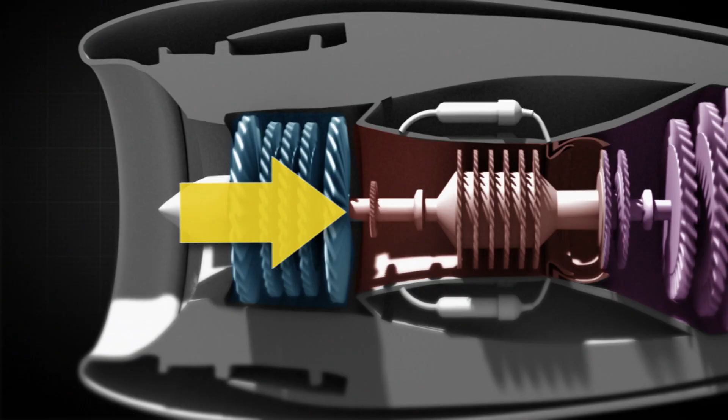We might not notice, but tremendous technology and mind-boggling science constantly surround us in the products we use every day. Behind their practical use lurk hidden histories, dramatic discoveries, and awesome experiments. They are wicked inventions.

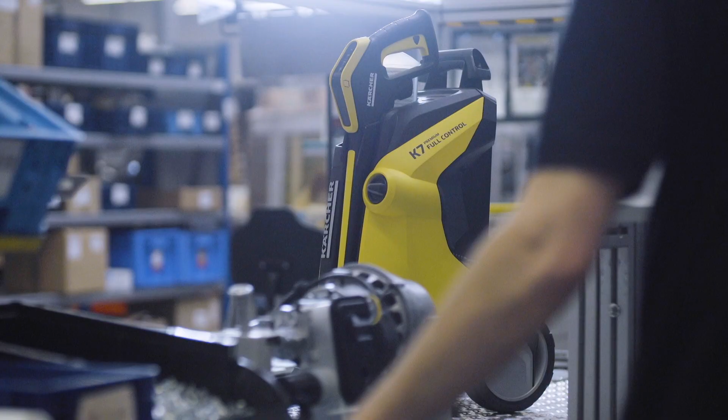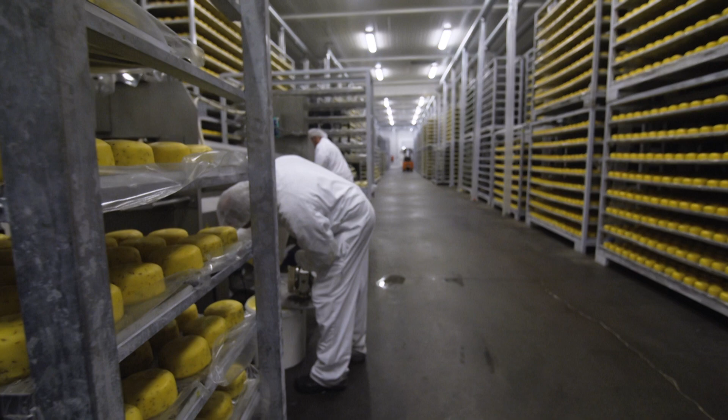Coming up, pressure washers. How an alcohol incident led to a better way to clean. Steam engines. How can boiling water push a train down a track? Cheese. What is the connection between animal stomachs and the discovery of cheese? We reveal the history and fascinating production process for this fantastic food. We reveal the surprising science and amazing manufacture behind these wicked inventions.

Pressure washers use high-pressure water spray to remove mud, dirt, or even dust from surfaces and objects, such as vehicles and buildings. But just how were they introduced? Pressure washers, like a lot of inventions, actually came by accident. And it was a man called Frank Ofeldt, and he was actually trying to create a portable whiskey distillery during the Prohibition time in America.

In 1926, he discovered that the steam bursting out of his contraption was actually moving the grease on his floor, and he thought he was onto something. This accidental creation turned out to be a wicked invention. When Ofeldt searched for components for his steam machine, he collaborated with Frederick E. Schumann of the Homestead Valve Company. This model was known as the high-pressure Jenny.

A little bit later, in the 1930s, German inventor Alfred Karcher invented submersible heating elements, and this was part of the beginning of pressure washers. So he combined these elements to create what we now know as a pressure washer. And it was only in 1950 that he actually put all the elements together. The key element was the water, and it was the strength and the power of the water, the intensity of the water hitting a surface, that actually created the cleaning process.

This washer was called the DS350 Jet. This was his company's first of many products. The DS350 model relied on steam, whereas this wicked invention now has a high-pressured water flow, regulated temperature, and the ability of injecting detergent. So since 1984, they've been available to the public, and now anyone can have a pressure washer to clean their car, their patio or their driveway, and it's easy for everyone. So, just how do companies such as Karcher make them today?

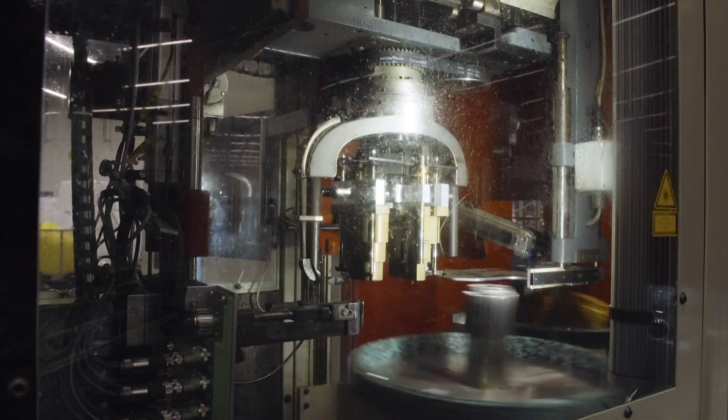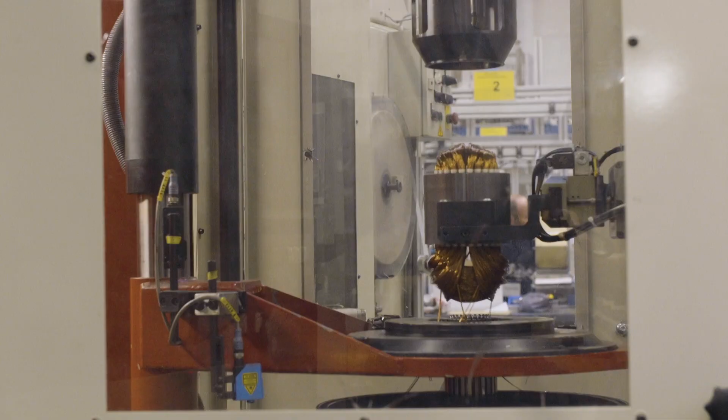Karcher, based in Germany, are world-leading producers of pressure washers for domestic and industrial use. Karcher is the leading company of cleaning equipment in the world. Since 1950, we produce high-pressure cleaners and other cleaning equipment very successfully. The production of a pressure washer begins with the all-important electric motor, otherwise known as the engine. Here we can see the stator winding for this motor. 480 meters of copper wire are spun at very high speeds, a whole 150 turns per minute. This stator using the spun copper wire will essentially generate power for the pressure washer.

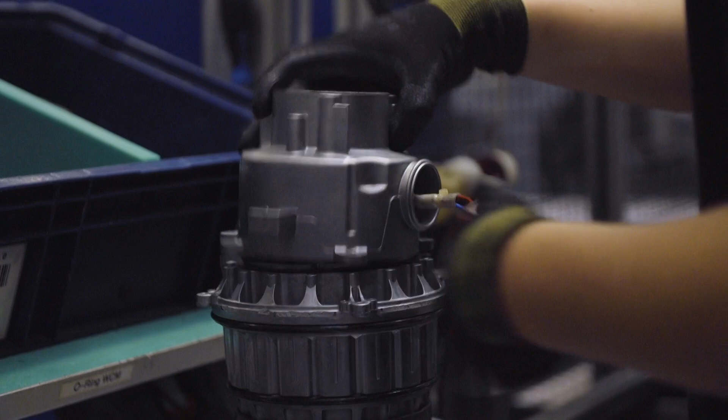The power is generated in these electromagnetic motors by passing alternating currents through opposing pairs of magnets to create a magnetic field in the motor's rotor, causing it to spin around fast and generate power. This particular motor will be able to generate 160 bars of pressure in the finished pressure washer, unleashing a whopping 600 litres of water an hour. Paper insulation is added to the motor before the finished unit is checked and transported to the next stage of production. The final step in the production of the engine is to mount the cable harness to it. Once this has been achieved, the basic engine is complete.

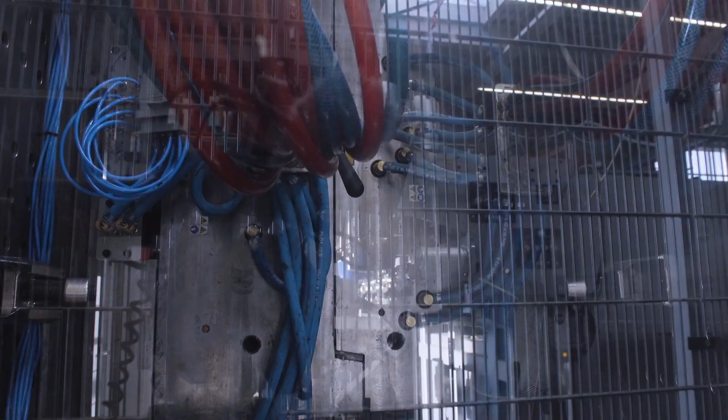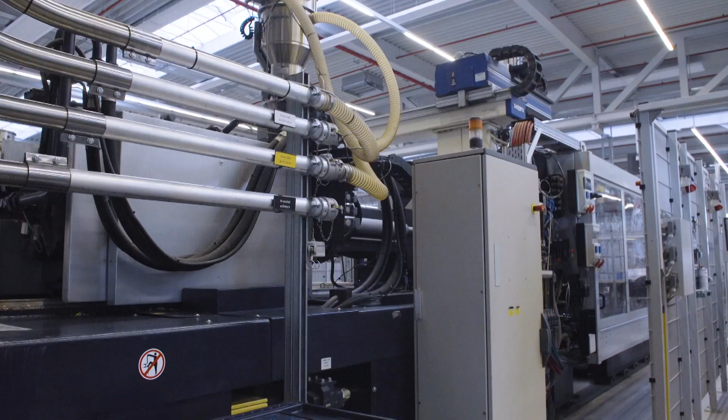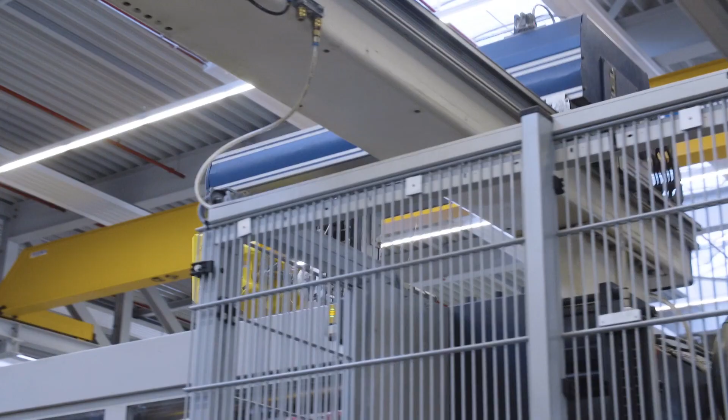Whilst the engine is being prepared, the plastic parts of the pressure washers are formed using injection moulding. At the injection moulding machine, raw plastic pellets are heated and pumped into purpose-built moulds that will form all of the external casings and covers for the pressure washer. These parts here will go on to form the hood and the chassis of the machine. Once moulded, the parts are stamped with all the relevant logos in another highly efficient automated process.

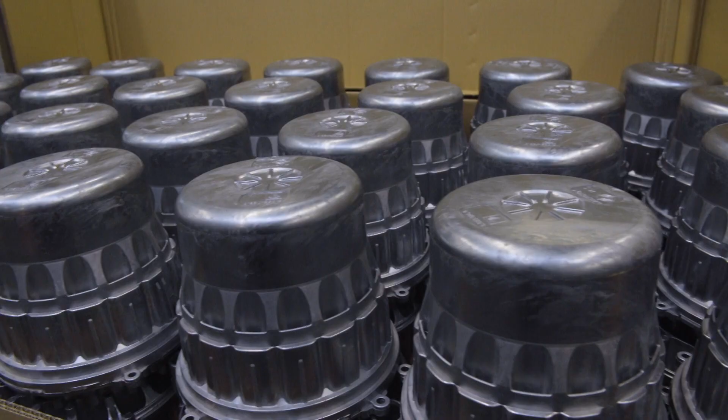More than 50% of the value is automated with robots and automated machines. So we can produce very competitively in Germany at a high quality level. The next production line is the motor line. The aluminium housing of the motor is prepared and fitted around the stator that was prepared earlier.

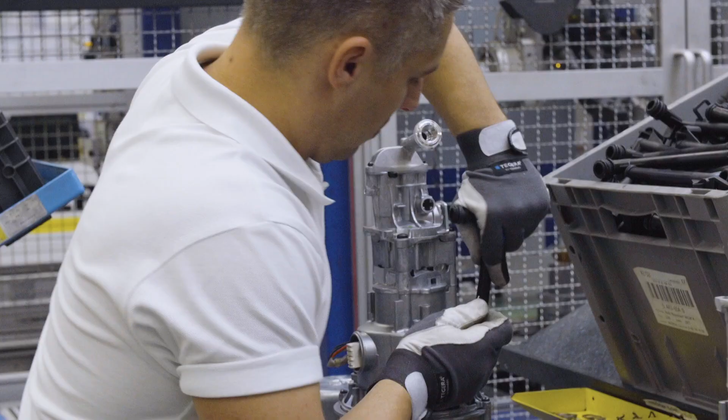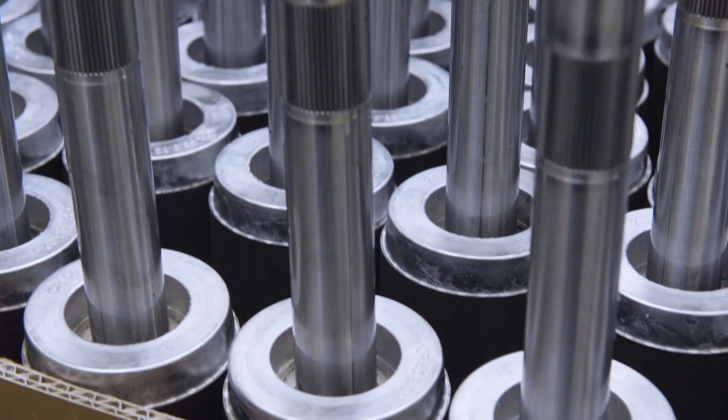From here, the machine is built up, step by step, in a number of assembly line processes. These include fitting the shaft to the rotor and installing the water inlet. This station is actually called the 3-in-1 station, as 3 processes all happen here. These are the screwing of the water housing unit, the oil housing unit, and also a leakage test.

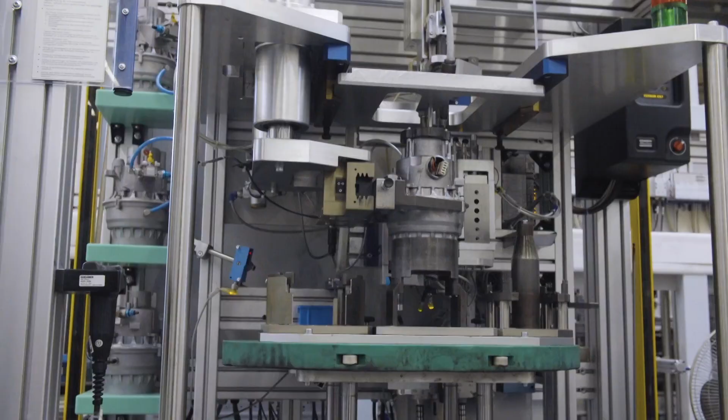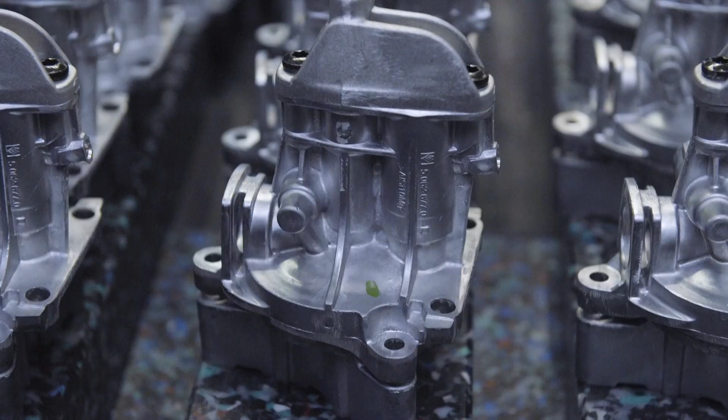At this station, the motor housing and the cylinder heads are screwed together. If these parts are not in exactly the right position, the assembly process will automatically stop, thanks to optical sensors that are constantly operating. And after this, the pump set is complete.

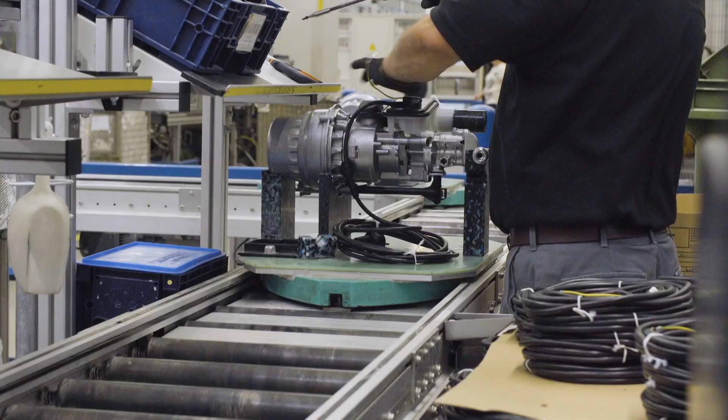From here, the electrical system of the pressure washer, known as the E-box, can be assembled. This E-box controls all of the pressure washer's electronics, most notably including the connections of the main power cord and the on-off power cord switch. The machine then moves on to a fully automatic testing station to ensure that everything is operating as it should.

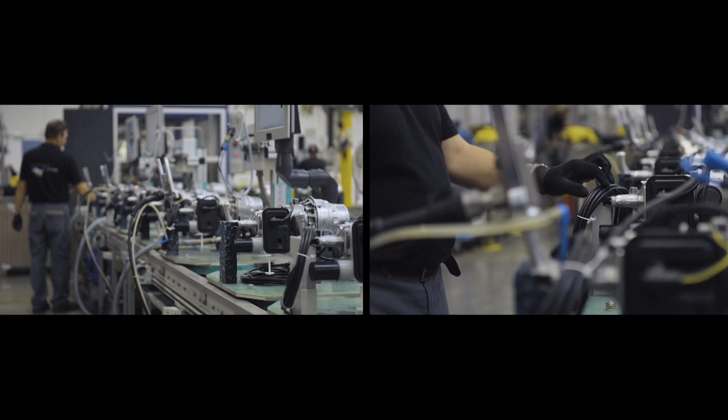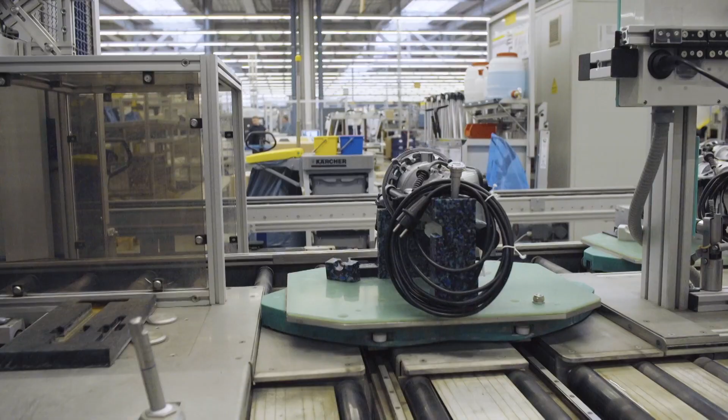In high season, every 3 seconds we produce one machine. So we are able to produce up to 30,000 machines a day coming out of this factory. Now that the pump set and all of the electrical components are complete and have passed testing, those injection moulded parts from before can come into play. The final assembled pump is placed into the plastic cover.

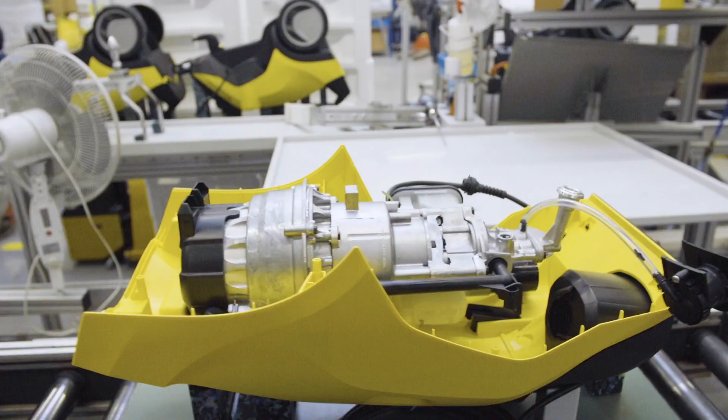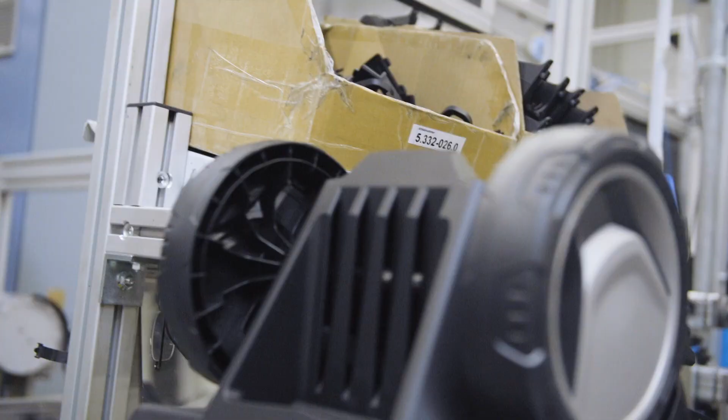The chassis and hood can then be assembled, as well as the handle, wheels and all other detachable items of the pressure washer. Once this has been done, the pressure washer undergoes more testing, and it is then complete. From simple spun copper wire to a super-powered cleaning machine, pressure washers surely are a wicked invention.

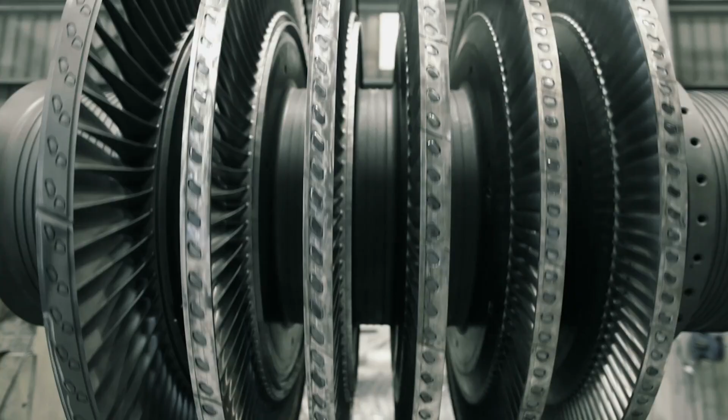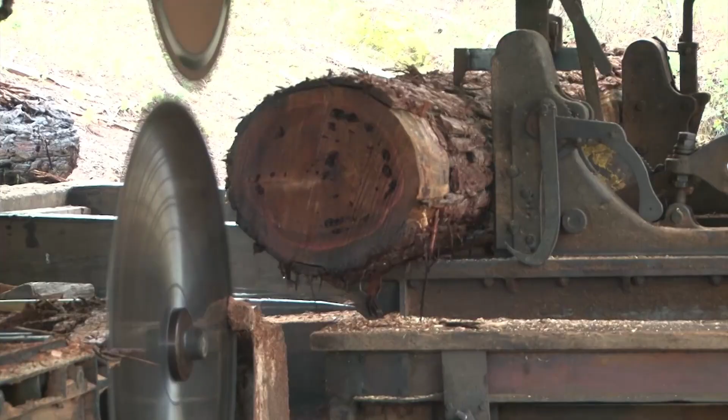Steam engines conjure up images of trains gently chugging across distant landscapes, whisking their occupants on a trip from a bygone age. But steam power is very much alive and an important power source today. In simple terms, a steam engine belongs to a family of machines called heat engines. All heat engines create mechanical work by converting heat or thermal and chemical energy to work, with a steam engine using steam as its working fluid.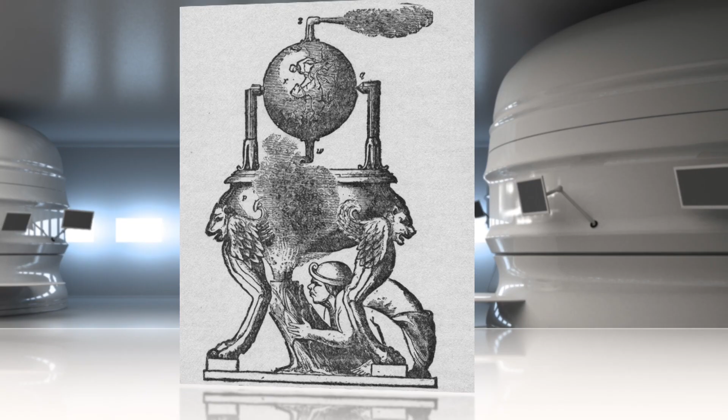Though we often believe steam power to be a relatively recent invention, its roots can be traced back as far as ancient Greece. In the 1st century AD, Hero of Alexandria described a device called an aeolipile that seemed to use steam as a means of propelling a spinning ball.

A cauldron was heated and the water in there produced steam. That steam was then injected into a sphere which had 2 small jets that pointed at opposite angles to each other, and as the sphere was filled with steam, it has to go out through the small jets, and it meant that the sphere rotated. It was an interesting toy, an interesting invention, showing that steam could be used to push things along. But as the steam is essentially gas that's ejected, it's not that effective.

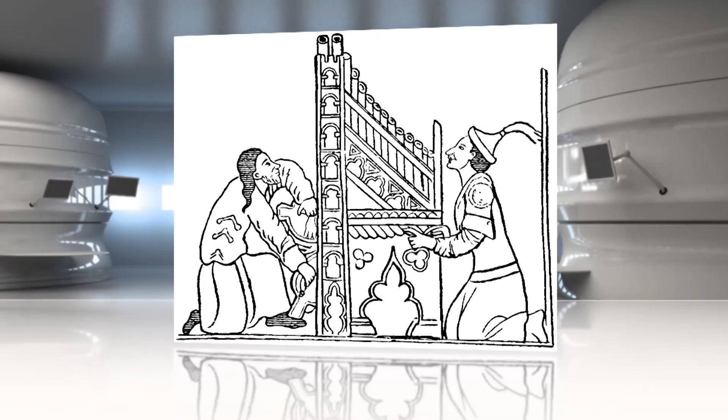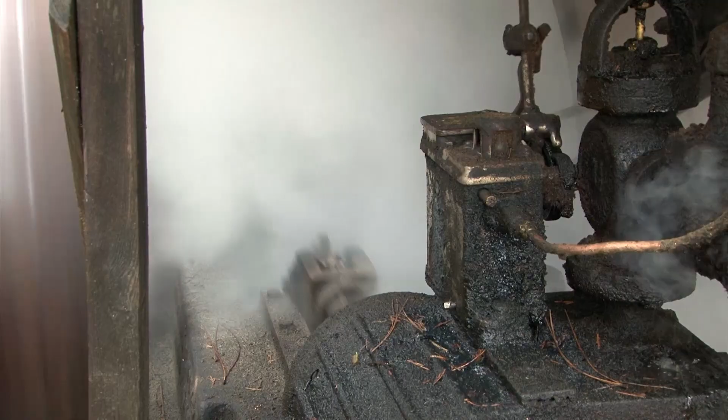Over the centuries, mathematicians, engineers and great thinkers, such as Leonardo da Vinci, toyed with the concept of deploying steam for some useful purpose, with steam-powered organs, weapons and roasting spits demonstrating the concept's potential, but ultimately failing to catch on. It wasn't until engineers in the 17th and 18th centuries started to combine multiple inventions such as pressure, pistons, vacuums and cylinders that a commercial steam engine could be produced.

Building on the work of fellow English engineer Thomas Savery, in 1712 Thomas Newcomen created a steam-powered pump for draining flooded mines, which demonstrated how steam power could be usefully and commercially harnessed.

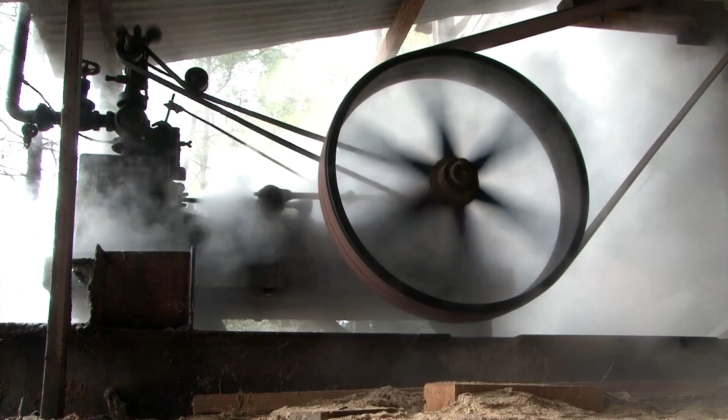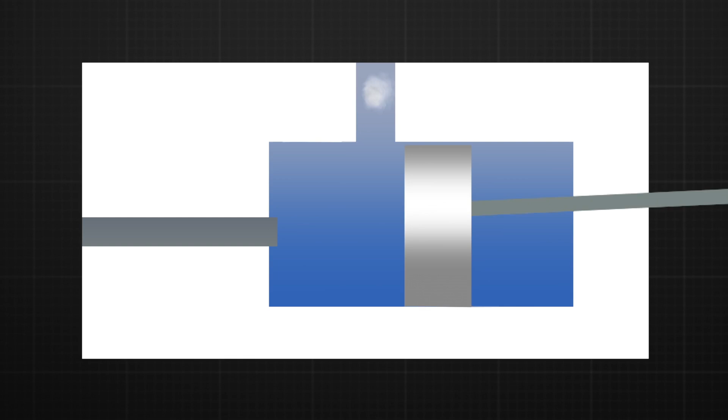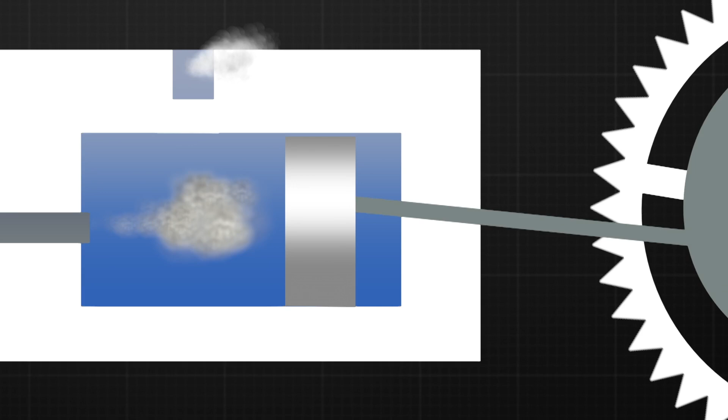A steam engine, in its simplest form, is heating water, which takes a lot of energy. When you heat the water, it converts to steam, that expands as a gas. It takes up a lot more space than the original water. Because it takes up a lot more space and is desiring to expand under pressure, if you put a piston at the end of the steam and it's well sealed, that steam will push against that piston. If you have that piston on the other end connected to something you want to do work with, as it pushes out, you get a conversion from whatever you were burning into water, into steam, and that produces work.

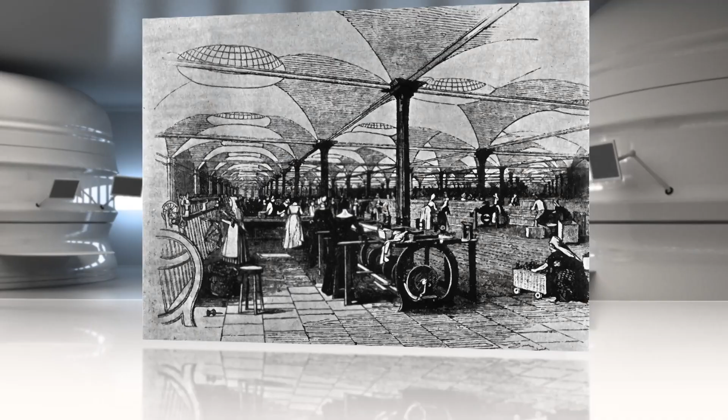Now that you have mechanical work and repeatable mechanical work, you could automate away a lot of processes that were very manual and laborious. In Great Britain, the steam engine was to power the mighty manufacture of the Industrial Revolution, where new automated manufacturing processes and technology was to bring a period of technological dominance to the British Isles in the late 1700s and early 1800s.

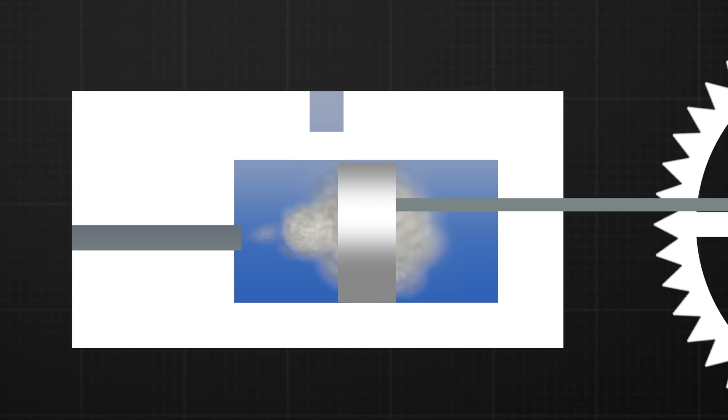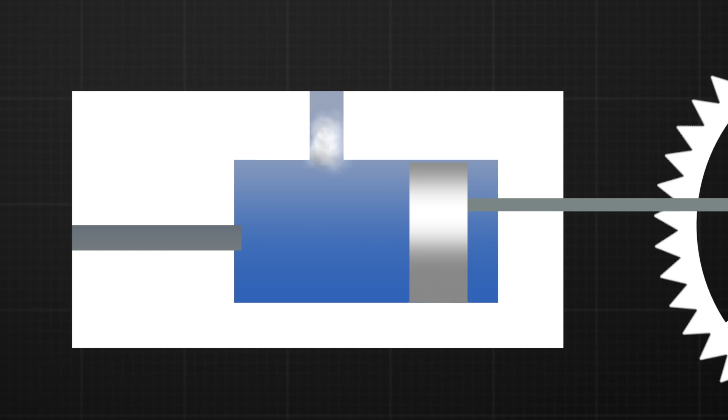By this time, Scots engineer James Watt had improved the efficiency of the steam engine by making the piston create mechanical work as it moved in both directions. The reason a steam engine works in both directions on a piston is that as you add pressure, that pushes this piston out. When you release that pressure, often there's a weight on the actual system that pushes it back in, but that escape of gas creates a suction and can pull the piston back. So as you add the pressure, you push it out, and as you release the pressure, you suck it back in, which is the careful design that James Watt designed to move the suction into a separate cylinder so that you can do work on both actions.

Now, if you combine that with a wheel or a rotary system, you start to be able to produce, well, locomotion. You can move things forward. And the main designs thereafter started working around how do we get these cylinders to work at higher and higher pressures and more efficiently. Arguably, without the steam engine, there would probably not have been the Industrial Revolution. Coal, which fueled manufacture and iron foundries, needed steam engines to allow for its mining. Trade and the economy could prosper as ships used steam to power through the world seas, and the steam-powered railways started to connect towns and countries.

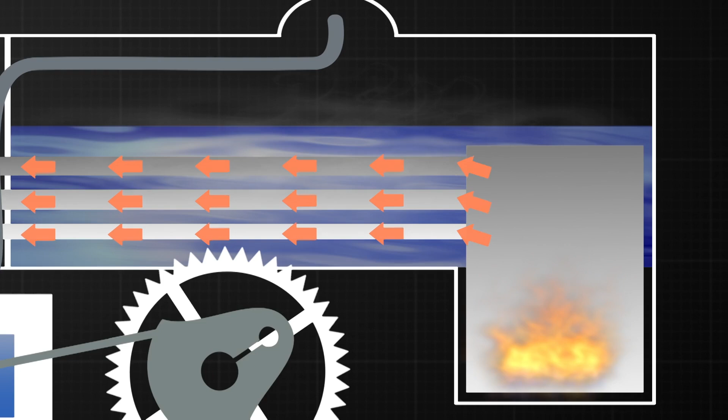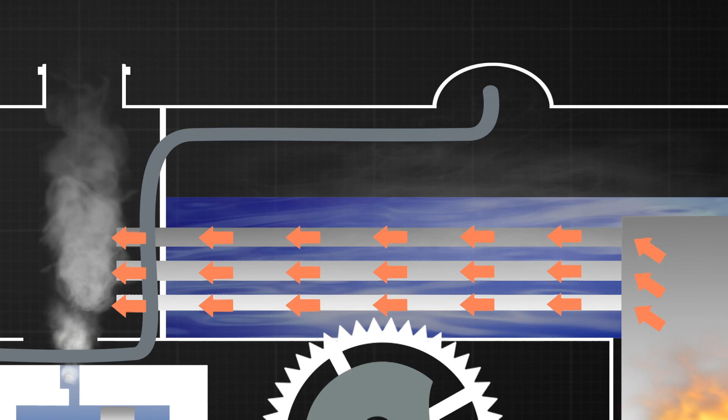The steam train has become the most evocative symbol of steam power. But how do they move? A simple steam-powered train has a roaring coal fire, which takes the heat the fire produces and allows it to pass through the boiler inside thin metal tubes. The heat and smoke pass into the chimney and exit the train, but have heated the water inside the boiler and turned it into steam.

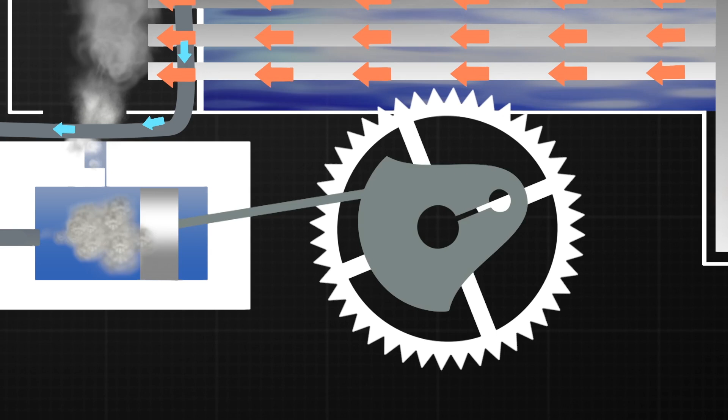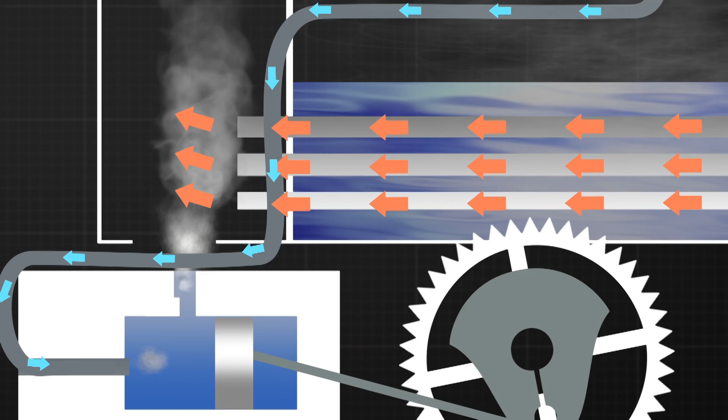The steam generated in the boiler flows down into a cylinder just ahead of the wheels, pushing a tight-fitting piston back and forth. The piston is connected to one or more of the locomotive's wheels through a crank and connecting rod, and as the piston pushes, the crank and connecting rod turn the train's wheels and power it along the rails. When the piston has reached the end of the cylinder, it can push no further, and the train's momentum carries the crank onwards, pushing the piston back into the cylinder the way it came. An outlet valve opens and the piston pushes the steam back through the cylinder and out up the locomotive's chimney. The characteristic chuff-chuff noise and smoke that a steam engine makes happen when the piston moves back and forth in the cylinder.

They may be a beautiful piece of engineering, but unfortunately the steam engine is terribly inefficient, with 80 to 90% of all the energy produced from the coal they burn wasted. It was no surprise then that the increasingly economical petrol and diesel internal combustion engines of the 20th century became the dominant and more practical power source for driving global industrialization and mobility. Even though the steam engine has been relegated to a nostalgic role of romanticised machine of yesteryear, steam power is very much still in use today. A great deal of the electricity produced globally is created by turbines that are spun by steam generated by heating water with coal or nuclear fuels, and steam's historic use in transport has left other important legacies.

The steam engine has produced a lot of industrialization, has produced the rail networks in many countries that were needed in order to transport goods. If you transport goods, you can also transport people. You can then bring a better economy. You can also bring a freer flow of ideas. And as the steam engine grew its success, with the free flow of ideas, people in poor incomes could actually travel and see greater parts of their countries or other countries and bring a more egalitarian society. From ancient Greek curiosity to nuclear-powered turbine, the steam engine is truly a wicked invention.

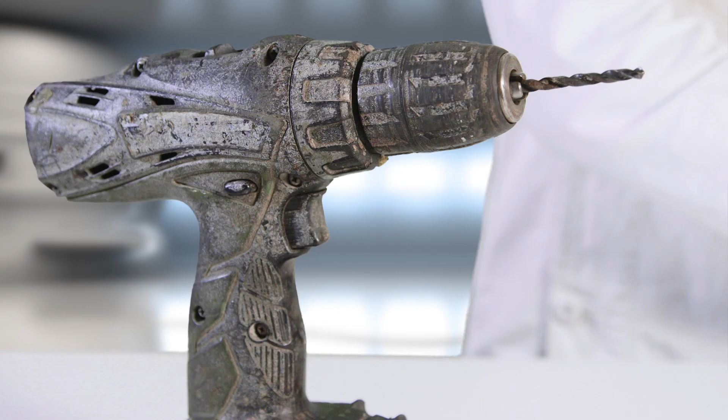Can we create a steam-powered boat from a juice carton? We're going to need an empty fruit juice carton, a tea light, some glue, a plastic bendy straw, duct tape, some Blu Tack, a craft knife, a drill, and an empty air freshener canister.

To begin, cut open the empty fruit juice carton and fashion it into a ship's hull. Next, we drill a hole in the top of the empty canister the same size as the bendy straw. We glue the straw into place, making sure there is an airtight seal. Next, we drill another hole into the bottom of the carton for where the bendy tube can exit the boat.

We carefully fill the canister with water and position the tea light under the canister. Using Blu Tack for ballast, we light the candle and place the boat in some water. Be patient, but soon you will see bubbles slowly seeping out of the straw. As the canister heats up, the bubbles will become continuous and your ship will start to move under its own power.

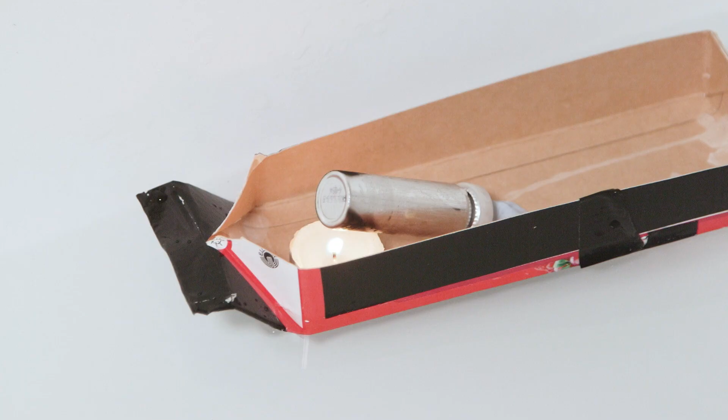Like a real steam boiler, when heat is applied to the canister, the water inside flashes into steam. The expanding steam pushes some of the water out of the bendy straw, propelling the boat forward. The steam bubble then condenses, creating a vacuum which draws water back in through the straw. The cooled water that is brought back into the canister is then heated and flashed into steam, and the cycle repeats.

Can we create a steam-powered boat from a juice carton? Yes, we can. Wicked challenge smashed.

Cheese has been a popular food for centuries, but just how did a man's journey without food and drink make cheese what it is today? Cheese is a food derived from milk, and it is produced in a wide range of flavours and textures. The origins of cheese is shrouded in mystery.

Many believe cheese was first created by an Arabian merchant who was in search of satisfying his hunger and thirst. His method was storing milk in the stomach of an animal. Probably the most likely theory was storing milk in containers which had previously been stomachs of animals.

Animal stomachs naturally contain rennet, and rennet is the agent which is needed to create the curds and the whey. So someone's obviously put milk in a stomach container and it's naturally produced cheese. Curds and whey are produced when milk curdles. The curds are the solid form and the whey is the liquid form. However, it wasn't until 1851 that we saw the first cheese production factory.

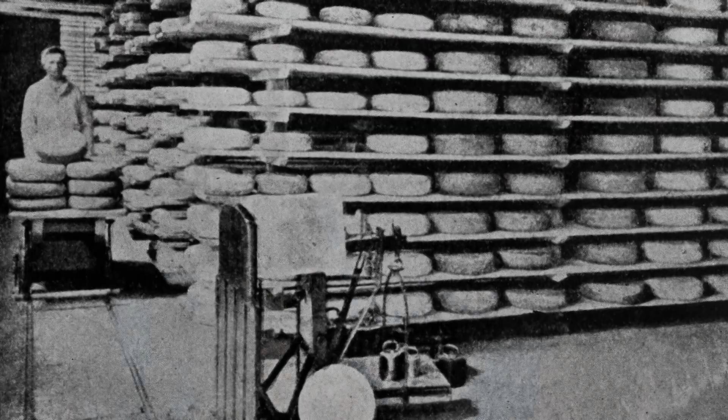You also find, going a little bit further forward, cheese factories popping up in places like Holland, the Low Countries, Belgium, Luxembourg. The introduction of factories across the world saw perhaps the greatest steps towards consistent flavour in cheeses, which was when rennet became a mass-produced commodity.

It was a way, once again, for farmers to preserve and extend the potential and the shelf life of milk. Now, milk shelf life isn't very long. Cheese shelf life, you've got years potentially. I mean, look at something like a Parmesan, which can be like 3 or 4 years old. So it always made sense to turn that milk into something else.

And you start to see the rise of plastic processed cheeses, all the way from that simple milk left in the stomach of an animal. This method extends the shelf life of cheese even more, but is often criticised for its health effects, as flavours and chemical preservatives are added throughout. The production of cheese has seen many changes, but just how is it made?

Henry Willig and his wife Riette took over the family dairy farm in 1974, where they had 30 cows. Not satisfied with only producing milk, they took a cheese-making course and brought their company into the cheese business. Fast forward over 40 years, and they now make cheese from goat and sheep milk too.

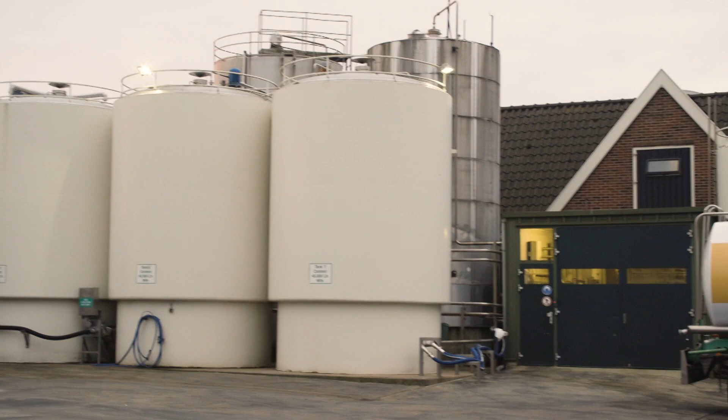Well, Henry Willig Cheese, the company, was founded by my father, Henry Willig. 42 years later, we still make cheese in the company, and we do it on a much larger scale. Tankers operated by Henry Willig visit around 50 Dutch milk farms to collect regular, organic and biodynamic cow milk, along with regular and organic goat and sheep milk.

These lorries drive all over Holland, bringing back milks that make up over 95% of the cheese produced by Henry Willig. So Henry Willig Cheese makes approximately 10,000 cheeses a day. Within 24 hours of the milk arriving at the factory, it must quickly undergo 2 vital processes.

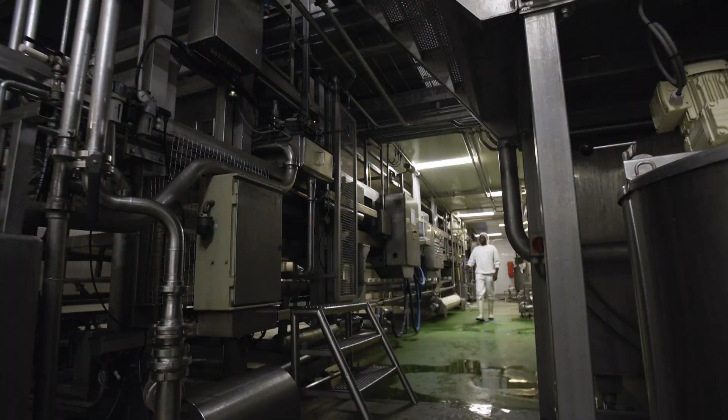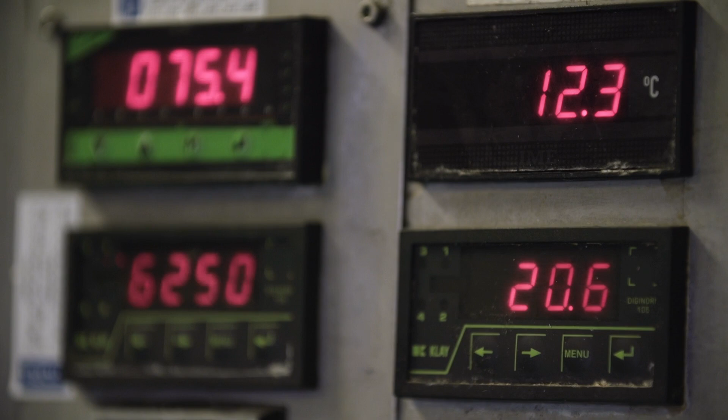The first process is only for cow's milk and is called standardisation, which makes sure the milk is of the right quality to be made into cheese. If it isn't quite up to scratch, cream and skim milk can be added to improve the quality. The second process is pasteurization, which involves quickly heating up the milk to about 75 degrees Celsius for 15 seconds and then immediately cooling the milk. This process kills and deactivates the unwanted enzymes and harmful bacteria that would make the milk go off quickly.

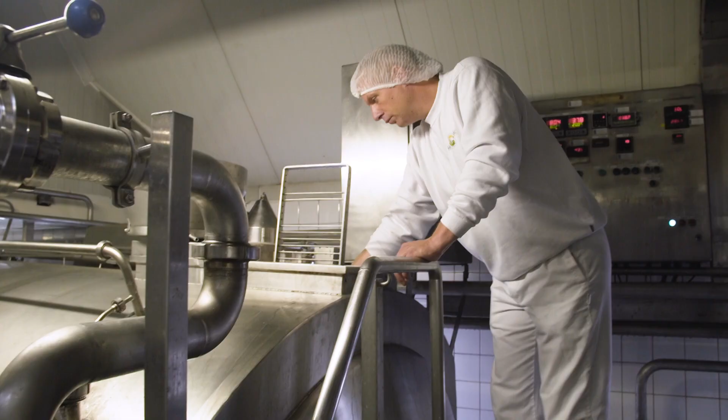So the main challenges are, firstly, you need to have great milk. So we pay the dairy farms we work with extra if they deliver us first-class milk.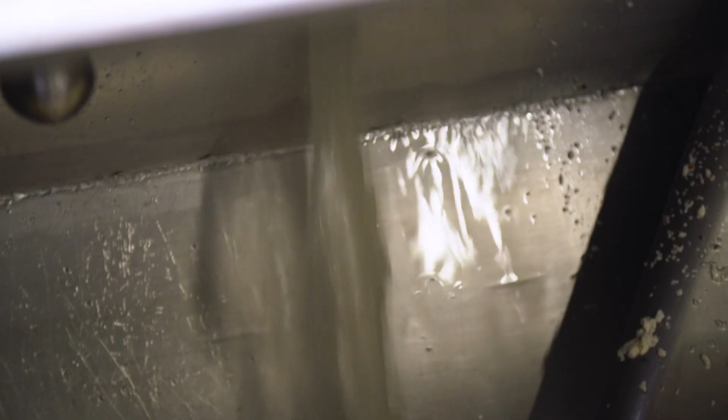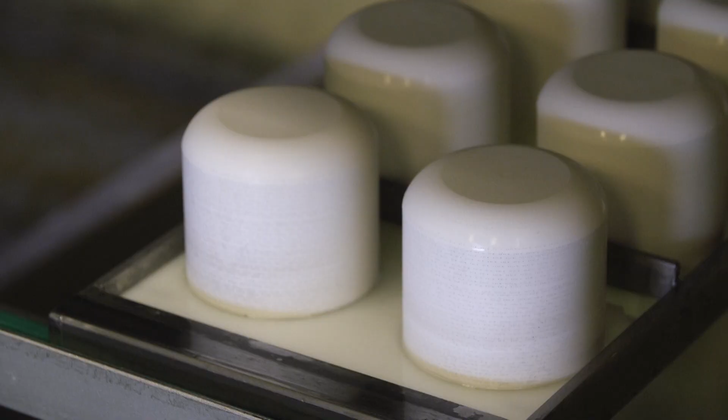After the curd is prepared, the lactose is washed out, leaving a mild cheese that will be deposited into moulds. But first, a variety of carefully chosen herbs are mixed in with the curds. These will season and add flavour to the finished cheeses to cater to different consumer tastes. The curds can then be inserted into moulds shaped like iconic cheese truckles. Pressure is applied to compact the curds as tightly as possible. This will result in a solid cheese later on.

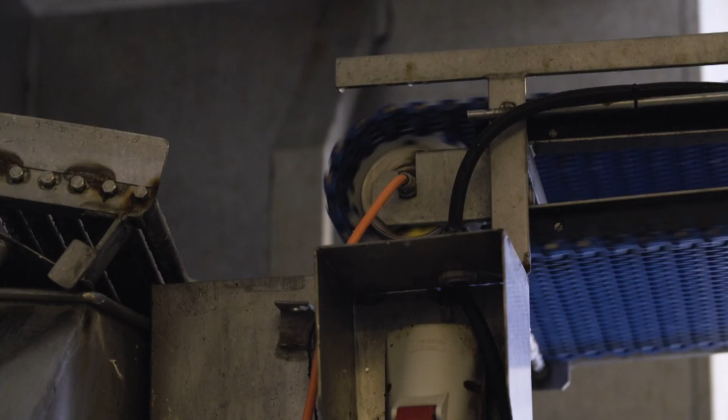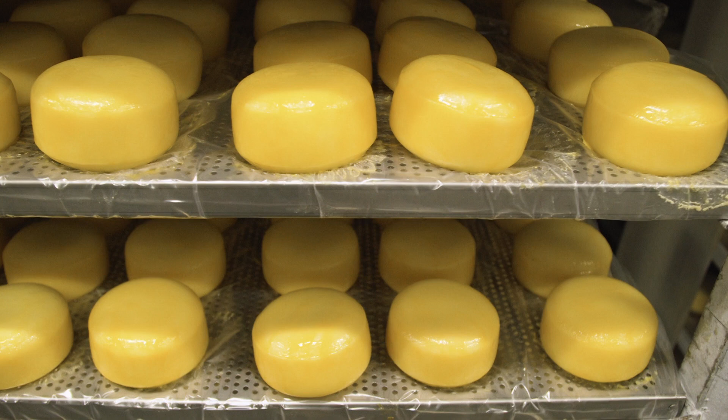Now that these curds have taken the shape of a block of cheese, they can be treated. The blocks are deposited into brine, which is better known as salt water, where they are left to soak for around 8 hours. During this process, the salt is absorbed into the cheese, which firms the rind. This is the very outer layer of the cheese. After the 8 hours have passed, the cheeses are removed from the brine bath and placed on shelves in the storeroom to undergo a process called naturally ripening.

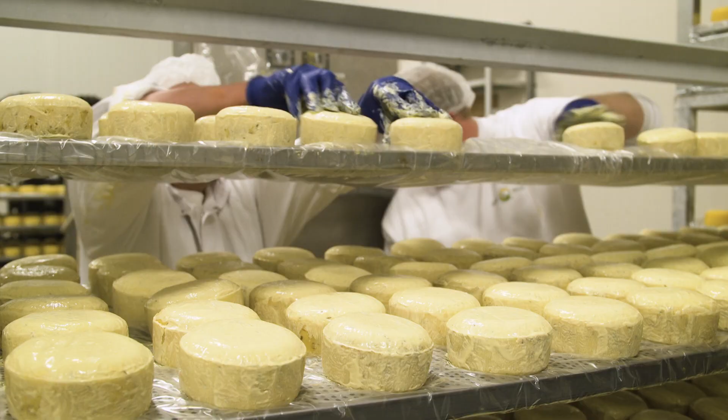If the cheesemakers are producing a batch of young cheese, then the ripening process is only allowed to go on for around 21 days. However, if a mature cheese is desired, the cheeses can be left for around 3 months. During this time, all the cheeses are regularly checked and turned. Each cheese is also coated in a special food-grade plastic, which is based on vinyl acetate copolymers. The plastic is applied as a liquid and allowed to dry. These steps help guarantee the best quality cheese with the best flavours.

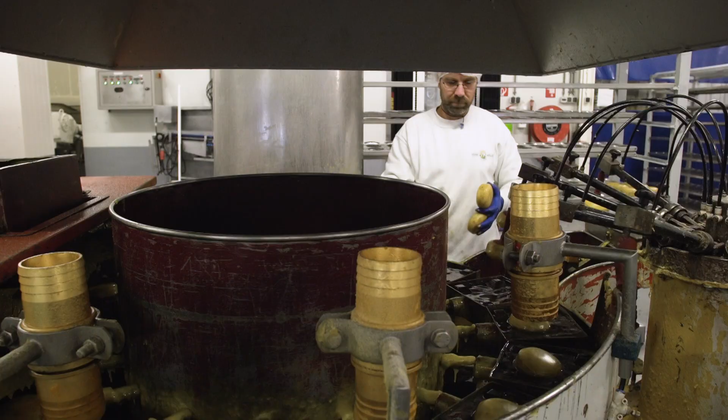Once the cheese has been maturing for the correct length of time, the ripening is slowed down by coating each block in a layer of paraffin wax. This coats the cheese in a hard protective layer, which ensures air cannot reach the product inside, therefore reducing the chance of mould growth. The cheese is then kept in a cold room to allow the wax to harden and set. The final stage is to label and check the product.

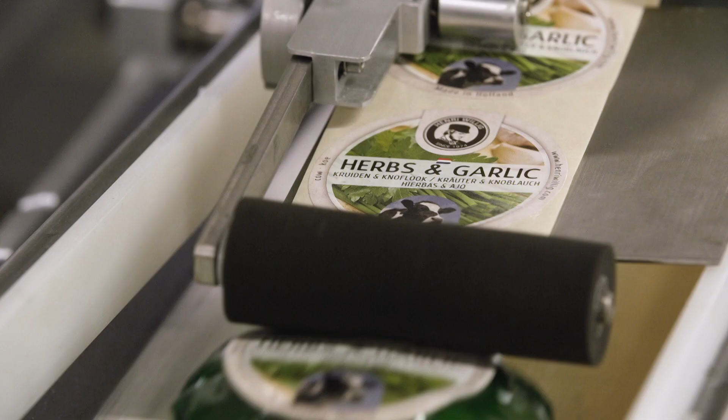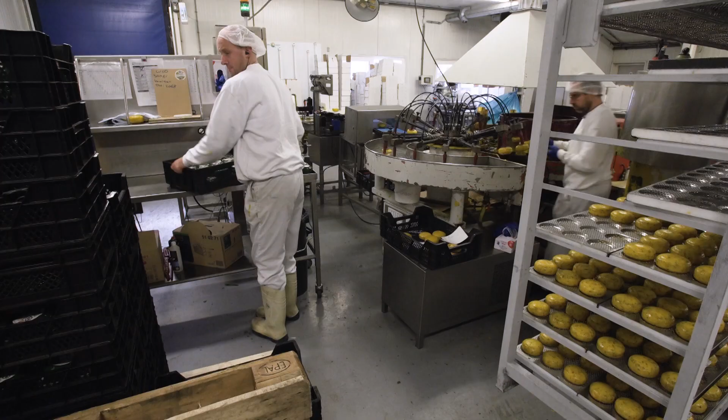The cheese travels along a conveyor belt, where a machine places a round sticker on the top surface of each block. These stickers decorate the cheese whilst informing the customer of the ingredients, nutritional values and delicious flavours inside. After a single pass through a metal detector, the cheese blocks are boxed up and packaged, ready for delivery.

So when the cheese leaves the factory, part of it is being sold in our own stores. Also, we export a large part of our cheese production. We export to approximately 30 countries worldwide. Whether in sandwiches or with fruit, these cheeses will be melting slowly in the mouths of people all around the world. Cheese, a deliciously wicked invention.

So, there you have it, a dash through the hidden history, super science and amazing manufacture of products that you use every day, but have never realised their amazing backgrounds. Pressure washers, steam engines, and cheese. All wicked inventions.